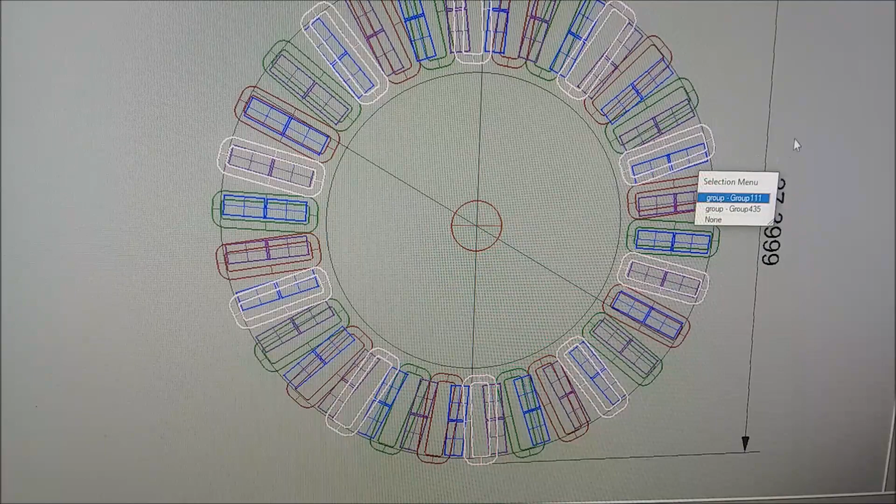Let's see here. We're going to click the magnets. Just find any magnet, they're all connected together. And pick a place where we can turn them around.

Now, if you look up there at 12 o'clock, you see a red coil and a yellow magnet just about to come to it. And as it passes over the first part of this coil, the left side of the coil, I think it's Faraday's law.

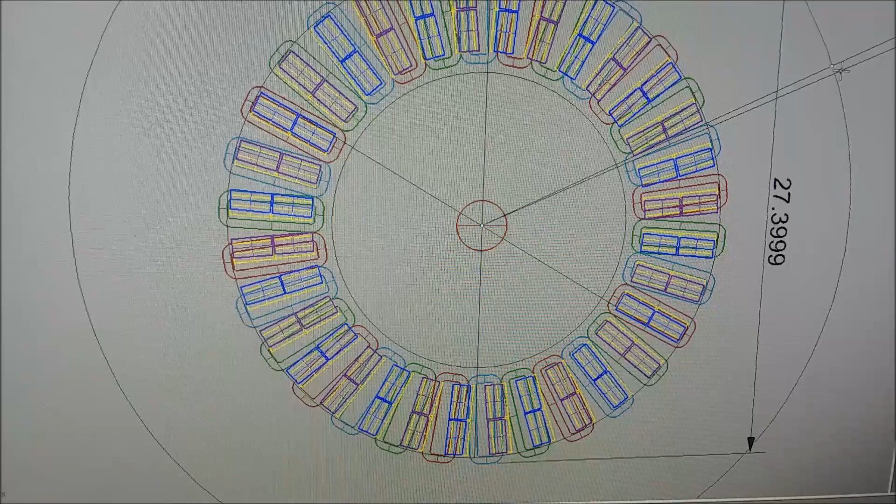It's one of those guys. If you wrap your fingers around the coil, around the wires, in the direction that the flux goes from the magnets, like from south to north, then your thumb points the direction of the current that it induces.

As it passes that first side of the coil - just for argument's sake, we're not going to figure out lefts and rights because we're going to change this whole video into a generator rather than an alternator, and that's the trick. So if we assume we wrapped our hand around from the top and our thumb was pointed down, that's the direction the current goes.

Now, as that magnet comes over to the other side, the magnetic flux is still the same, and your thumb is still pointing down. But you notice the rotation of the current is now the opposite direction around the coil. So it's alternating current because it went from turning clockwise to turning counterclockwise. Does that make any sense? That's what we're going to exploit in this video.

And as this thing goes around, we can get it up here. There's 6 intermediate positions to get a magnet from one red thing to the next red thing. If you're running it as a motor, you have 6 positions.

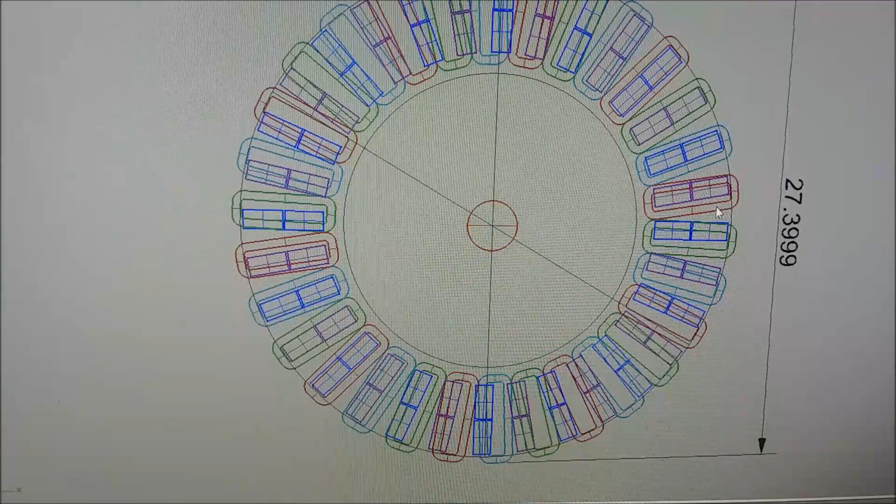But we're not going to run this as a motor, we're going to do it as a generator. This device that we have drawn here could run an electric car - be a really powerful electric car - but it's for a 20-some foot diameter, 7-meter whole house fan.

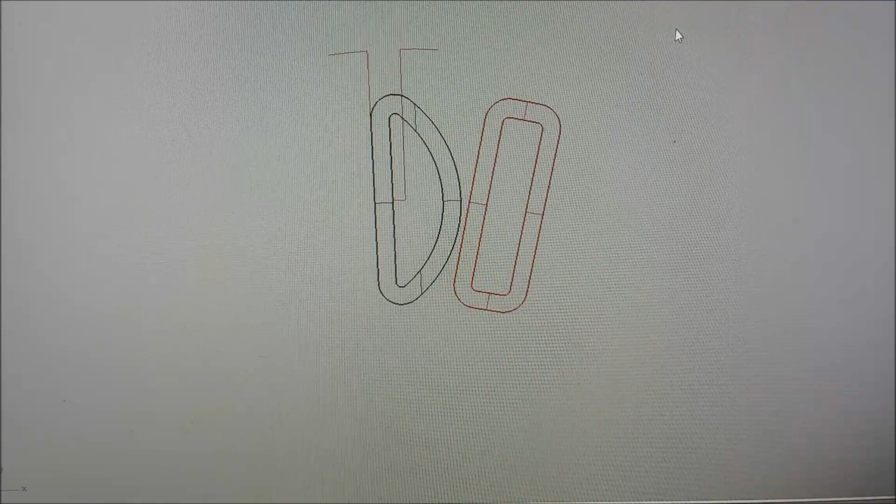Okay, here's that red coil we were just looking at. It's got these 2 parallel sides. The space in between, the rectangular space here, that's the shape of the magnet. It's a pretty close fit on the magnet when you make a coil - you don't want it big and sloppy. You also want those straight sides to line up parallel with the magnet.

If they're at an angle, they make less electricity. If they're 90 degrees to it, they make 0 electricity. So we're going to exploit that.

We're going to look over here on the left. We have what I'm going to call - if you invent it, you name it - I'm going to call it a D coil, D as in dog. We have a straight side here, and it's going to, if it was on the thing we were just looking at, be sending current down by the right-hand rule.

However, when that magnet comes over to the other side, it is not square with this side of the coil winding. Now, there's a section here from, I don't know, 8 or 10 degrees above 90 to 8 or 10 below, that some of it is lined up. After those angles, it probably produces absolutely nothing.

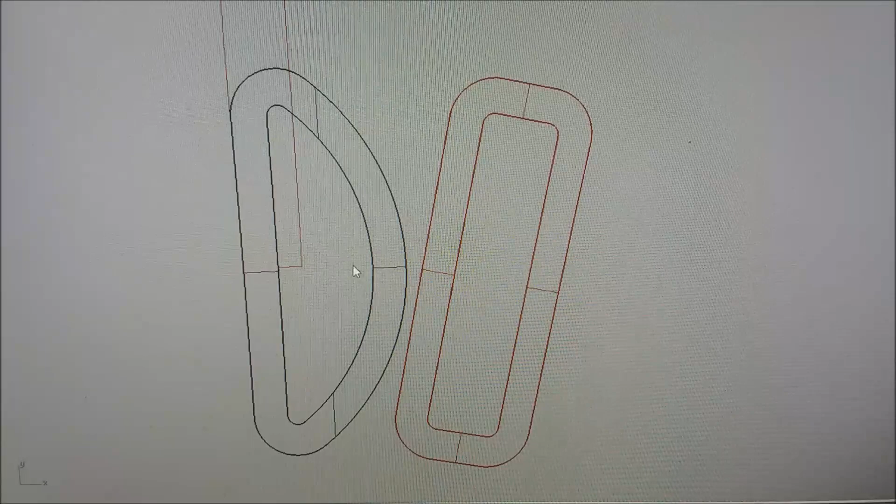But into that, in the middle here, you have a little bit of magnet exposure on something that is parallel. But there's very little reverse voltage, because the magnet is in line with this, makes full power on that side. But over here, you're not breaking the magnetic lines of flux with the wire - just barely. So that's the trick that's going to turn this into DC. We're making half of the wave.

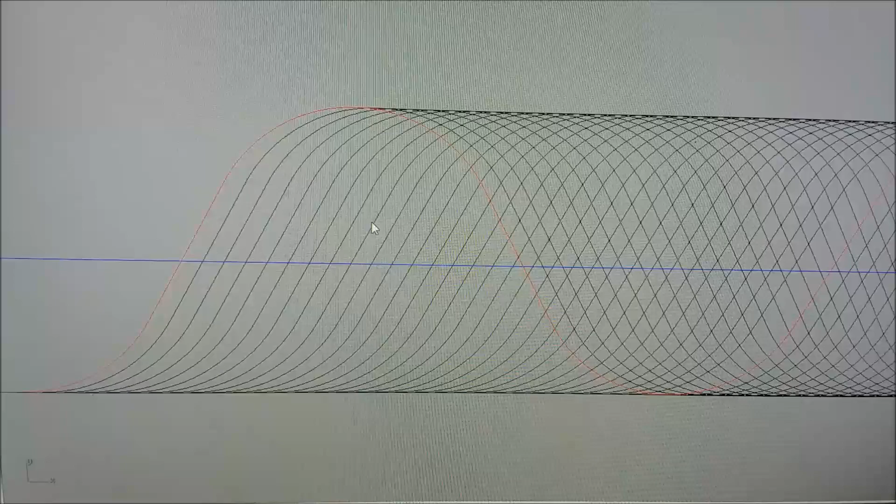This is going to be a single-phase permanent magnet generator, not an alternator, a generator. We have done away with all the voltage swings of the sine curve below the line. Yeah, that's an exaggeration. That little bit that does line up, if we have 48 volts on the side we're trying to use, we might generate 3 to 5 volts on the other side. They're bucking voltages, and they're going to cancel out a little bit as they pass over that one point. It's not really significant.

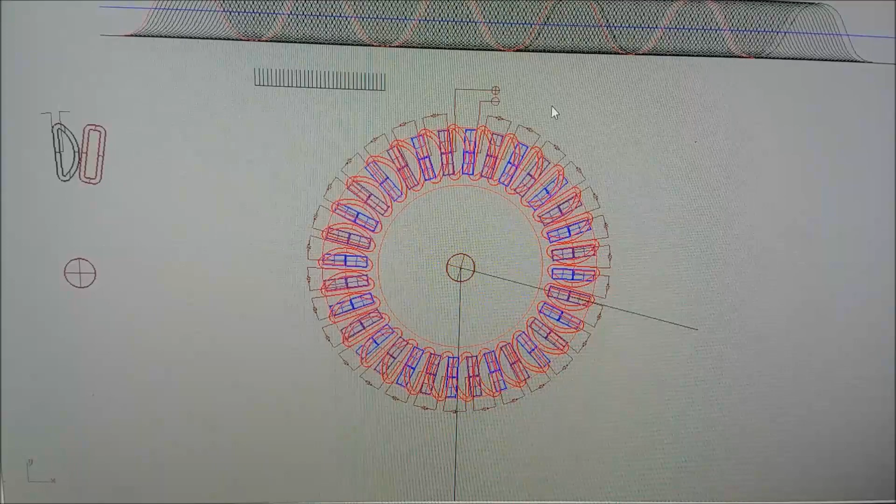It's very little. But if you were to make a triangular form to wrap your coil around and make more of a peak out here, like a V-shaped, like a triangle-shaped, then you'd have a lot less. I think it's harder on the wire trying to do that. And the only part that counts on this is when this magnet comes in front of that.

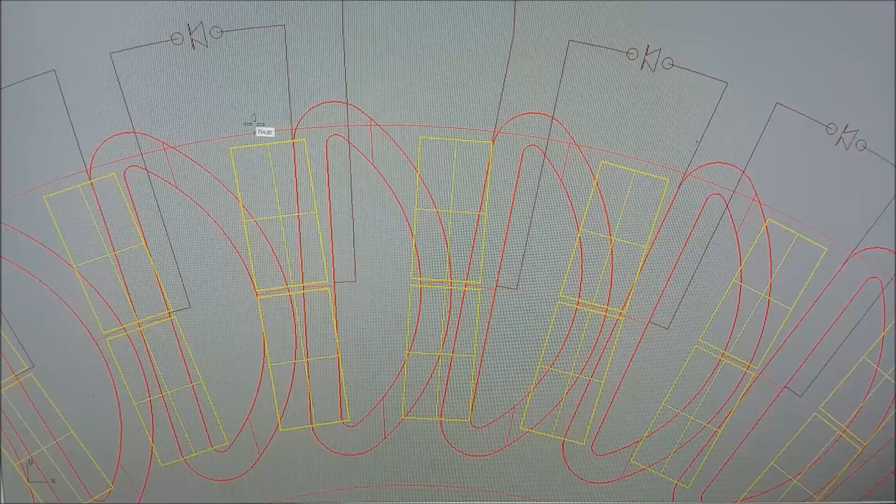Where is that thing we just did on the other one? I'm gonna take this. Find the center, please. Okay, we're looking at this magnet right here.

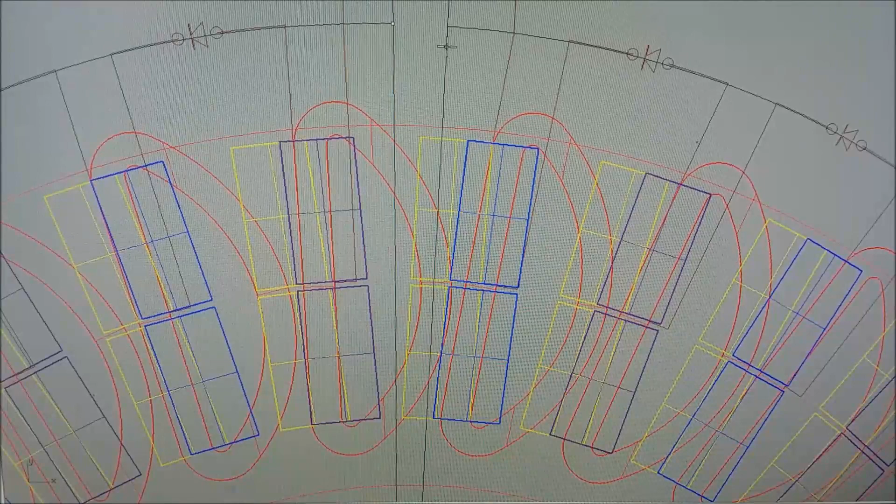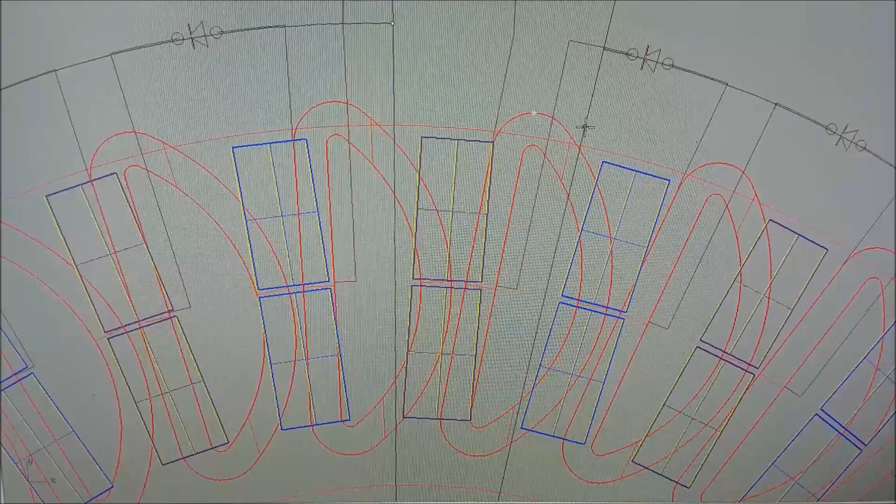As it comes over and it centers up on that, that's you're intersecting all the flux lines of that magnet with that coil. And then it comes over and gets to the other side, and you can see that there's not much of the coil lined up with the magnet, so you're going to get very little power. Even though the current is going the wrong direction, there's not much of it. It's really biased the other way.

So people like to see animation. We're going to call this animation just for subscriber 5. He likes animation, and animation.

Now, because I've not actually built this, I'm just trying to explain how one part of how alternators work. You've got magnets that are north and south, and you've got poles that make a positive voltage on one side and a negative voltage on the other side. V equals IR. The resistance is changing and everything is changing.

Anyway, to make a 3-phase, you have 3 sets of coils. There's a blue, a yellow, and a purple, I think. And you connect every third one together to make a phase. So you have 3 phase from this coil here. It's 10 degrees to the next phase, 10 to the third phase, and then you're back to the same phase you started on, because it repeats.

To simplify this thing, we're going to turn it into a generator. First thing we change is the magnets on the magnet wheel. Normally we have north-south, north-south, north-south. They're magnetized through the magnet faces, through the big faces, so the flux is pointed up and down. The down side sitting on a metal plate, it goes through the metal plate.

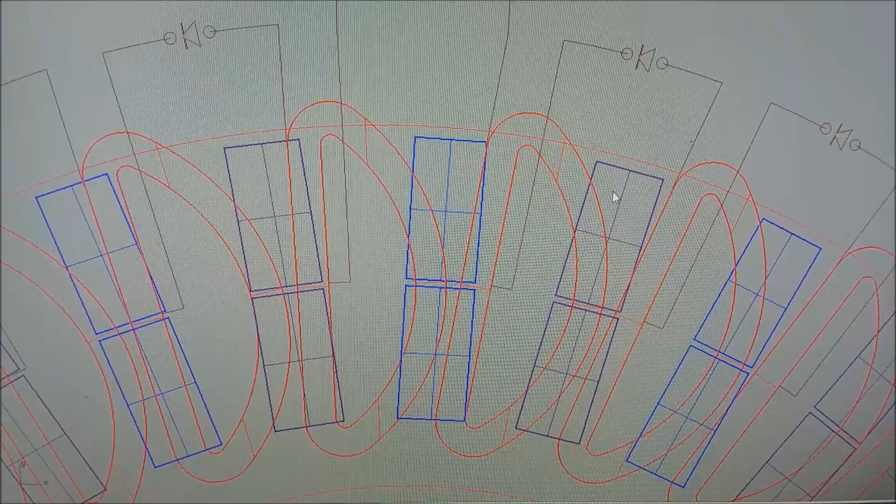Also, you're boosting the magnetic Gauss because now it's not interacting with the plates, it's interacting with the magnets on the other side, pulling more of the flux right through your coil. So it's much more efficient with the two rotor plates than it would be with 2 stators with a plate each. Won't make as much power as you will with 1 stator, and the 2 plates are working on the same coils.

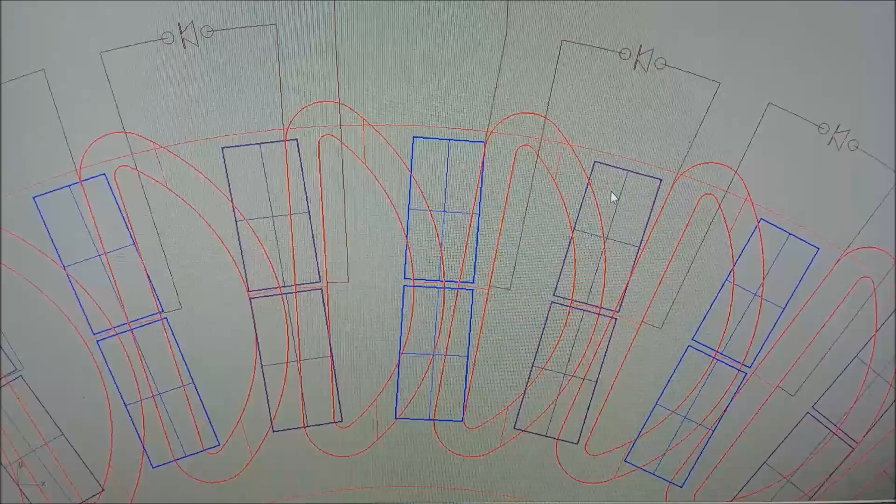Now, because we've got a little bit of back EMF on this thing, up here what we're looking at is the symbol I use when I have to make a diode on something. It's similar to the one electricians use. Basically, current can come in the funnel and out, but if it's trying to come the other way, it runs into this plate and it stops it. It's a one-way check valve for electricity.

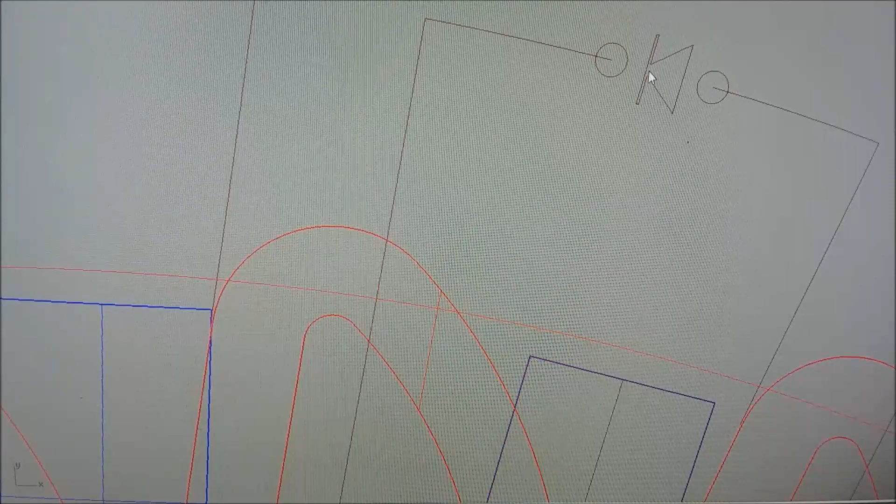If we put a diode on each coil, like the wire coming out of that's the one that's not all wrapped up in something. Okay, over here. Here's the wire going into the beginning of wrapping the coil. That's your lead coming out. And you wrap it around and round and round, and then it comes out, and this is the other end comes out. It's on the outside of the coil. This one's on the inside, and that one will be on the outside, so you know which one you're looking at, especially if you start your coil in the middle here. It's really easy to tell where that is. If you started both of them on this side, you may not be able to tell.

Anyway, all these coils are in series. So there's no clockwise, counterclockwise winding on the coils. So my trick for finding out which ones are holding you back and which ones are going, and shifting the rotations of the winding clockwise to counterclockwise to have nothing working against you, is not needed here. All the coils are absolutely identical.

The magnets, instead of being north-south, north-south, pick a configuration like all norths. Your whole one rotor, all the norths are facing up. Your whole other rotor, all the souths are facing down. So there's no confusion on which magnet is which. You don't have to worry about the alignment of the one rotor plate. The north magnet has to be above a south magnet on the other plate.

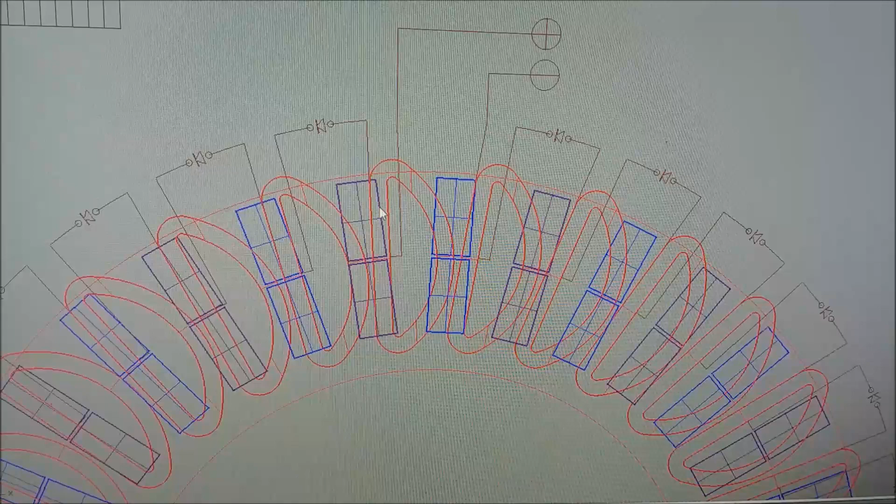Anyway, the diodes are in here to get rid of that little bit of back EMF. However, they are also a point of failure. You've got 29 diodes on the 30 coils. And any one of them fails, that opens a circuit, and there's not a complete circuit through your stator.

So I would advise, if anybody was to actually try to do this, I would bend these wires someplace here, bring them down to some point. Well, you could do it either way. Just make sure you have enough wire that you can swing it over and connect these together.

If you were doing it without the diodes, you would put a little extra wire here and solder to the next one. If you wanted to put the diode in, you would stick it in that part right here. Anyway, the diodes are a failure point. I would try it first with no diodes.

Basically, a ring of coils all the way around. Can't get no more simple than that. All the coils are the same. They're all connected the same rotation. The magnets are all facing the same way. You start in, you go through a bunch of coils, come around eventually through these coils, and come back out. That's your positive and negative for your generator.

It would be a permanent magnet generator, not an alternator. There's no phases. It's not an alternating current. It hasn't got phases. It's a single DC output.

If you put the diodes in there, it only generates power in one direction. Because the other way, the current would have to go through the coil and come back out the other wire, and it would hit the block on the diode, and it wouldn't go anyplace. So it's a one-way rotation.

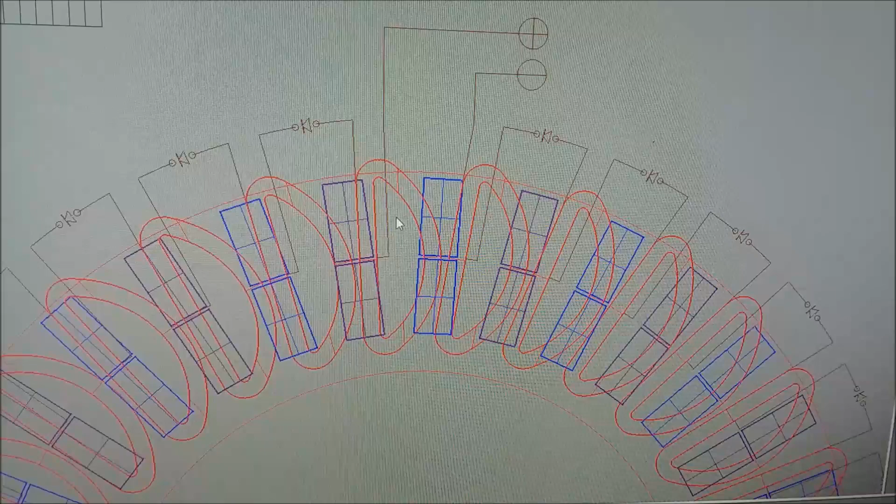So what have we learned here? We've learned that we've got rid of the negative side of the sine wave. We have a bunch of pulses, one from every time that magnet passes a coil, right? It makes a pulse of electricity.

To get one rotation of this thing, if you have 30 coils over here, you get 30 individual pulses. After you get away from the start to where you're out in the middle of the thing, that first one's like where you would connect it.

This voltage, while they're all varying and they're all added together, well, this is just all positive voltage, what do you call it? They're all sine waves, half a sine wave, the top half. But they're all the same. Like if it's minus on the bottom, plus on the top, that's what every one of them is, and they're additive because they're together.

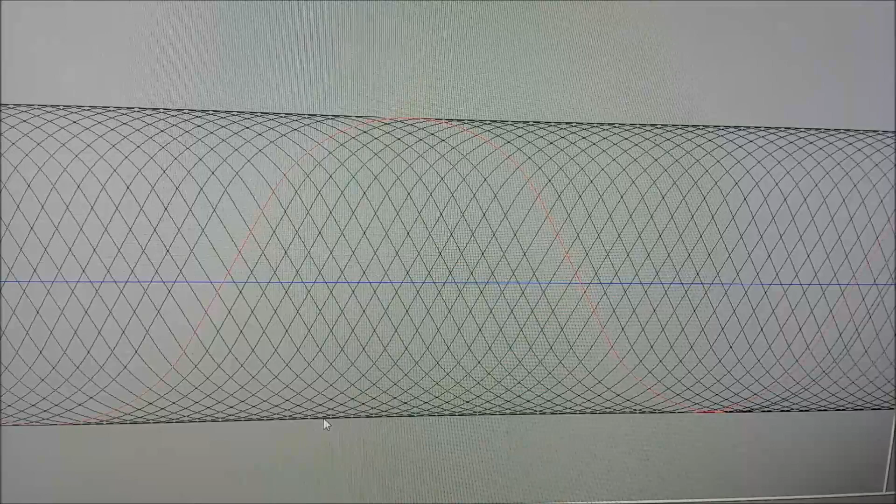Actually, it's a pretty ripple-free DC in the end. Still you have the high voltage and basically zero voltage at the bottom. So the area under the bell of the sine wave is what's going to determine when it's equal to the top, and that's what you're going to get for voltage, minus maybe 3%.

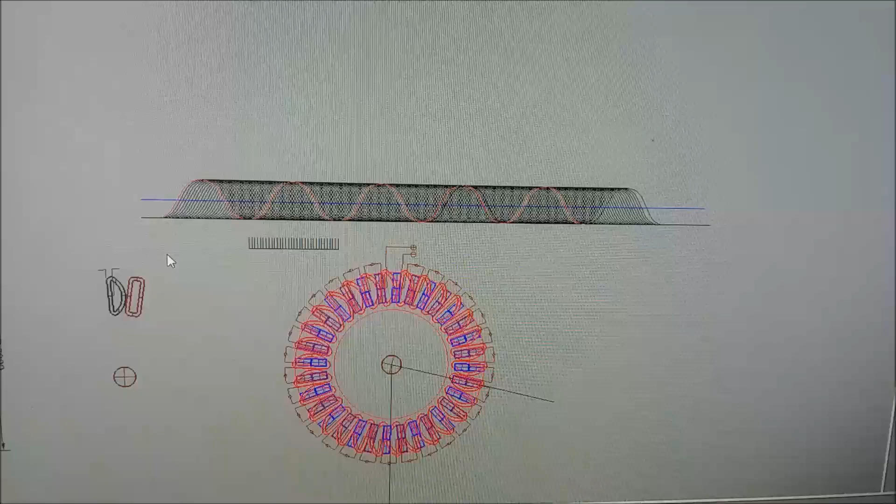So is there anything else to say about this? We have—let's go back over here again. This is more like random thoughts. In our alternator, this coil and that coil have to be wound in opposite directions. However, there's nothing to say that we can't make this D wider over to here and a really sharp point coming back, and you would have virtually no back EMF.

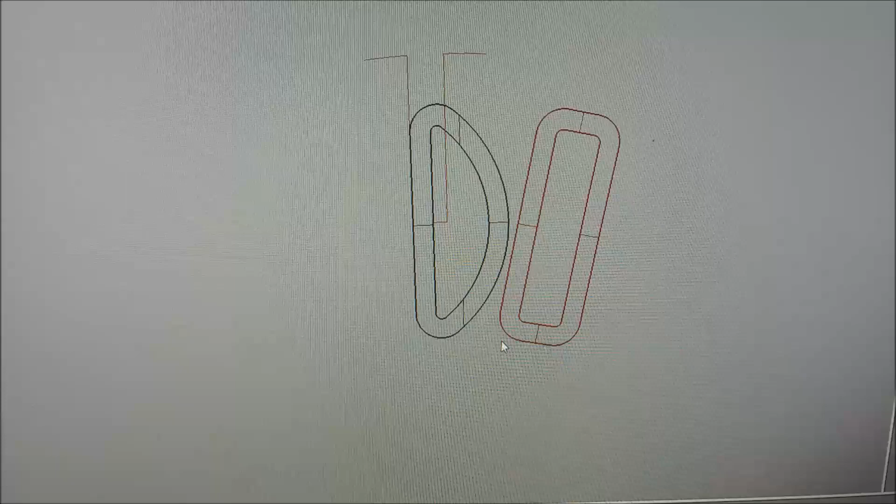You can make them and lay the straight edge of one on across the peak of the other one. If you take this thing, if you put an axle down the center of that, and you wound that coil around that axle, you still have wires going parallel to the flux, and the magnet flux gets cut by the wires. So you could lap these things over.

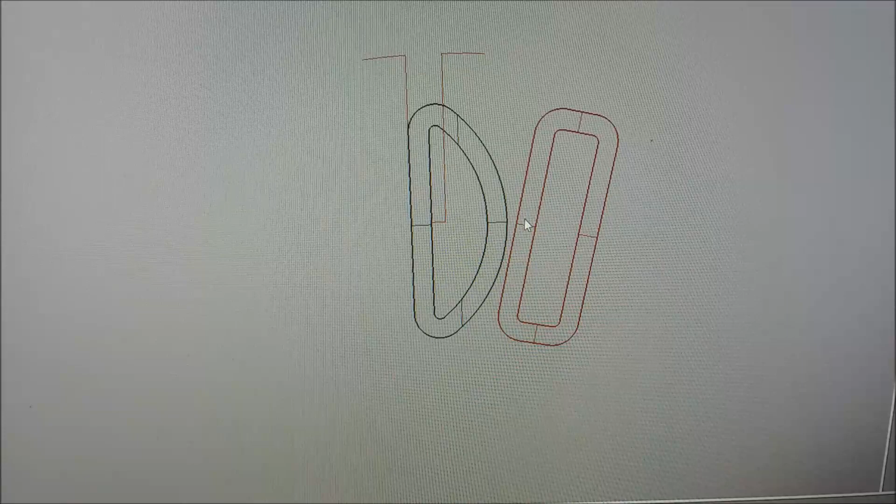The stator's built that way. They have a few odd things about them. I don't use them because the gap between the two magnet plates has to be bigger. Or it seems to me that it has to be bigger. I just don't see how I can get enough wire, even in that bigger circle, to get enough ohms.

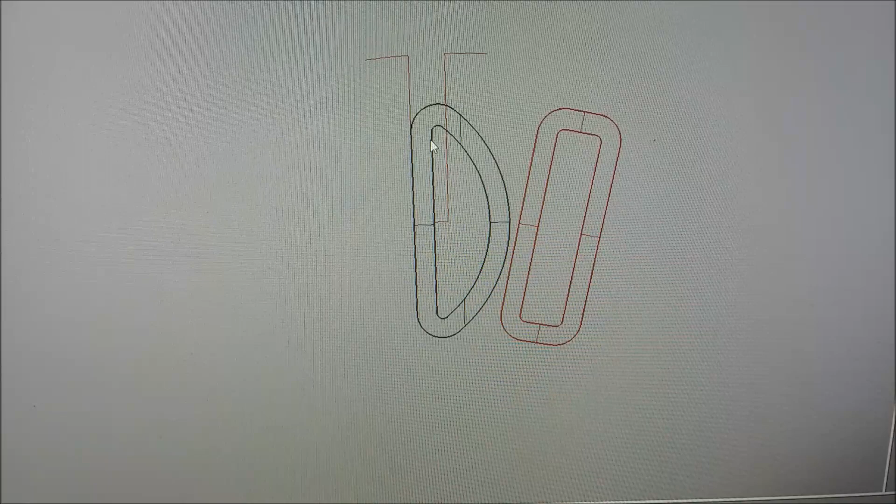Another thing, this DC generator deal, instead of having to use up all your ohms on 1/3 of your coils, you get to use all 3 of them. So the number of coil windings can be higher because you can use a smaller wire that's only 1/3 the amp capacity. It's not only that, it's cheaper, per foot.

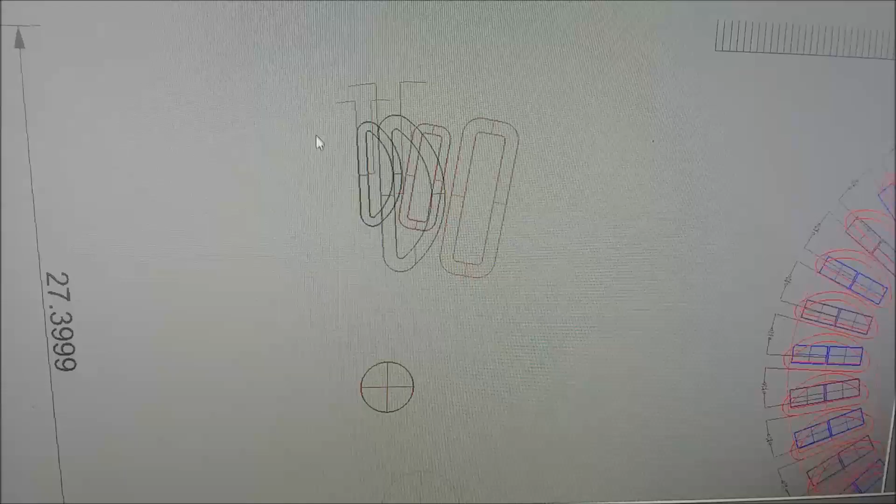Anyway, you could lap these things over. I think they call that a serpentine coil. I'm not sure, I've never built one of them, but I think they call it a serpentine coil. Anyhow, I'm just trying to explain how these alternators work. You're making a pulse.

You're making a pulse on both sides of your coil. And because this wire goes around, if it's going down on that side, it's coming up on this side.

Another item, if you're having trouble getting enough wire into your coil, there's nothing to keep you from running this coil wire out past the end of the magnet. You have to buy more wire. It doesn't get intersected by the flux, so if it's round on the end, it goes back as it's passing over.

It's not really generating much because the inside is the shape of the magnet, so there's really no great amount of flux up here. But the higher up you go, you can use more wire in the coil to get more resistance and get your voltage up on your machine.

I had to go to this, and I went to 2 mags because it just wasn't possible for me to get the voltage I needed and the amps I needed at the same time. I wanted a 48 volt fan with huge starting torque, so I ended up putting another row of magnets and making the coils twice as tall, but not really twice as much wire—maybe 70% more wire to the coil. But if I didn't make it that way, I could have gone up even farther.

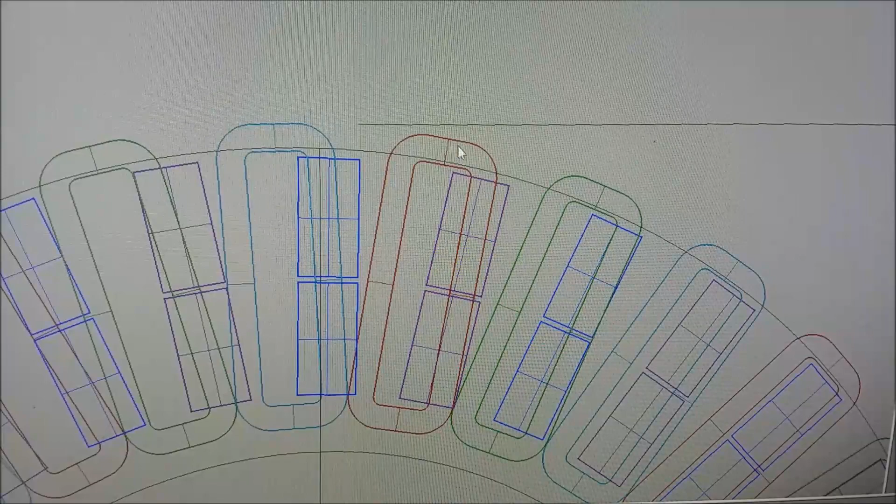I could have brought it up into here somewhere. Doesn't make any difference, it's not cutting. Magnetic flux is not cutting those wires, so they're just extra—like the wire that connects one coil to the one 3 over. You have a piece of wire up here.

I don't know, one of the 3 guys that looks at these videos, he's seen this thing before.

This stator, because I have 90,000 pounds of magnetic force on this thing, some ridiculous number—I'm kind of afraid of those magnets, to tell the truth. I don't mind riding a motorcycle 200 miles an hour, but I just don't think much of being anywhere near these magnets. So I made the stator into 2 pieces, and this is where you connect the 2 pieces together.

It also lets me change all kinds of configurations about how many coils are in a series and whether I'm making 3-phase or 5-phase. It can all be changed right here with these jumpers around the outside. But if I take the jumper wires off, then I've got 2 half stators.

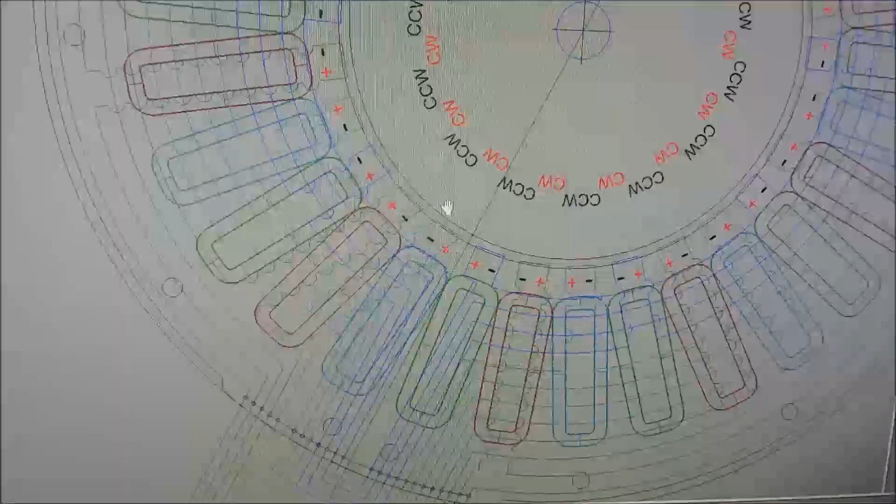I can slide them in between the magnet plates. And this is rigged up with my trick, where I have 2 coils clockwise. Let's see here.

It's not drawn on this one. This is before I did it—or else, actually, it's the same parts. If I take half of this stator and flip it upside down and butt it back together, that will put me 2 counterclockwise side by side, and 2 clockwise at the top end. This just happens to be drawn up this way, but the parts can be assembled or changed just by undoing some bolts—half an hour, something like that.

It's just that you have to go up through those magnets. There's really not magnetic flux outside of it because my plates are so thick—they totally absorb the backside magnetism. It gets transferred side to side and then back through the gap.

If you do this generator thing and find out you have way too much voltage, it's easy to dump voltage—it doesn't cost anything. You just jack your magnet plates farther away from the stator, up the air gap. Normally I'm running a 2mm air gap, which is, you could put a couple pieces of paper in there and it wouldn't take them out of your hand. But you could open that up to 1/4 of an inch and have exponentially less voltage.

By the same token, if your voltage is low on your system, you can crowd those things together—if you make them flat enough, like when you cast the epoxy on them between two pieces of phenolic board and wax paper, you clamp the crap out of it and smash it flat, then you can run a lot closer. I don't recommend sanding off any more than a few casting bubbles, because if you hit a wire, you can start over again.

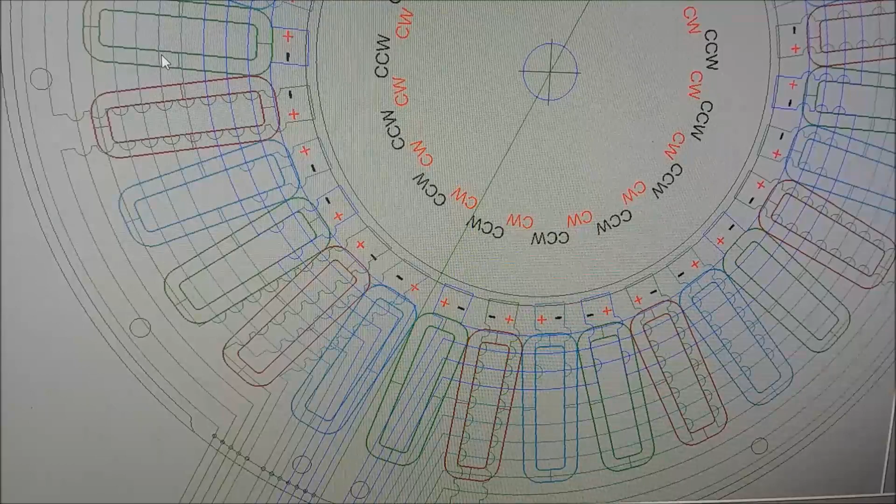How you connect them end to end makes a difference. I did a video explaining why I've got the two clockwise together and the two counterclockwise together. Just imagine you take this left side and flip it over, and it'll be up here, and what was up there will be down here.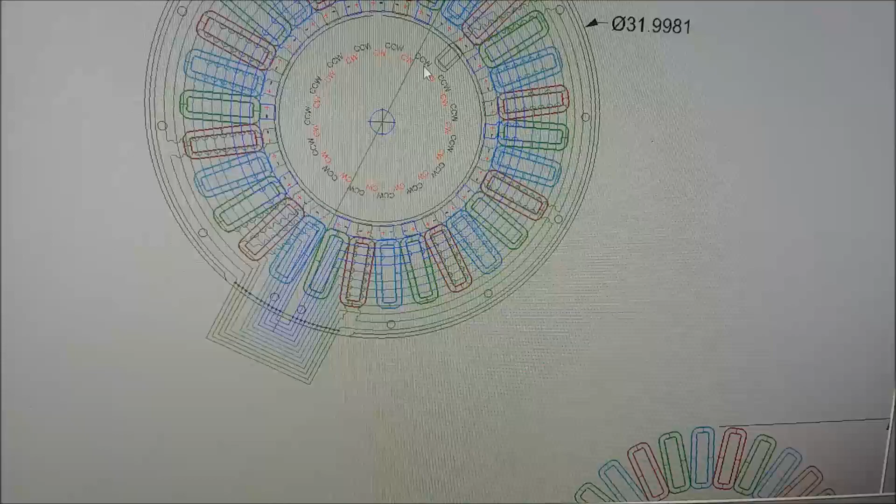And then you'll have two together and two together. At that point, I basically have two 180-degree motors, one running right behind the other. But there's no cogging because both of them are there. If I was to take one of them out of the system altogether, it would probably still turn because you've got enough to turn it, but it would definitely cog.

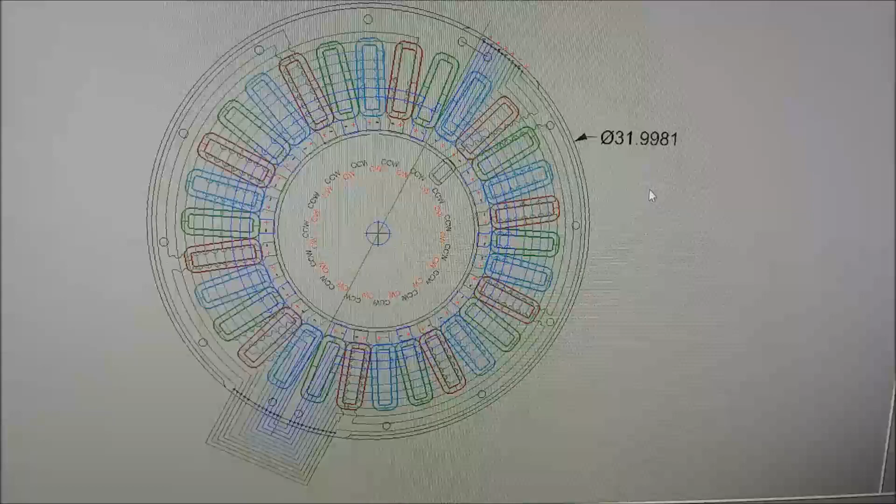Might knock the house down because this is a pretty big thing. That's the diameter of my plate that the magnets are on, 31.998, basically a 32-inch plate for the magnet. I don't know what size your generators and alternators are, but this is 32 inches. That ought to turn a 21-foot fan.

One last look down here. So we're doing away with having to have your magnets alternate on a plate. And we're doing away with having to have coils wound clockwise and counterclockwise, or connected inside to outside and outside to inside. They can all be connected straight on through into one continuous loop.

There's only one loop. It's DC. It's not a phase because it's the entire rotation, and it's just connected to the next rotation. So it makes only DC voltage. It makes 3 times the volts it would if it was being run as 3-phase, because you've got 3 times as many coil windings in series, 3 times as many coils. If they had the same number of winding wires, you'd have 3 times the voltage.

And if you're charging batteries, they're DC, so this would be DC. I don't see much advantage to forcing all these polarities to have to match up.

Another thing about DC, and I haven't done anything on it, but I need to—if I was to build this, I would check it out. If you're doing an in-runner or outrunner motor, like a model airplane engine, where the magnets spin around the outside of the coils and the coils are pointed towards the magnets, then you have to have metal poles, because the magnetic flux is not being cut.

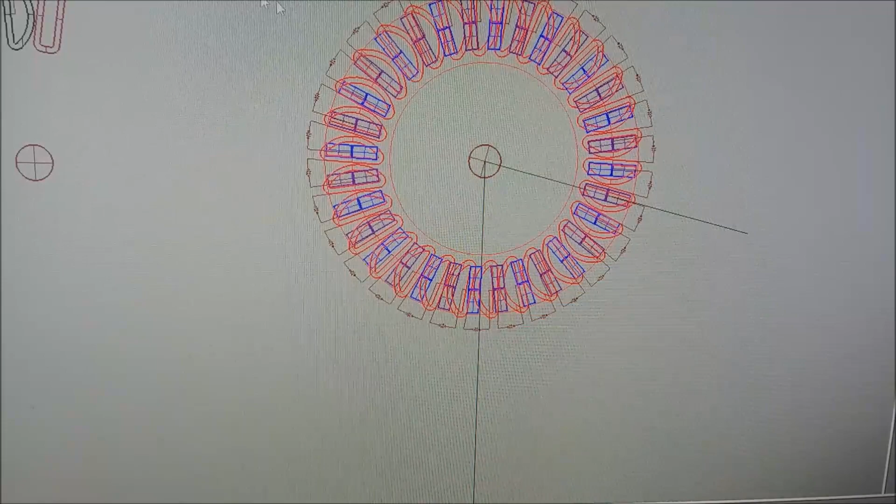Like I said, I'm into concrete house building right now, and this is just—I needed a fan in the house. I priced them, and they were $15,000. I said, no, I don't think so. My guy that makes the metal grills can make this.